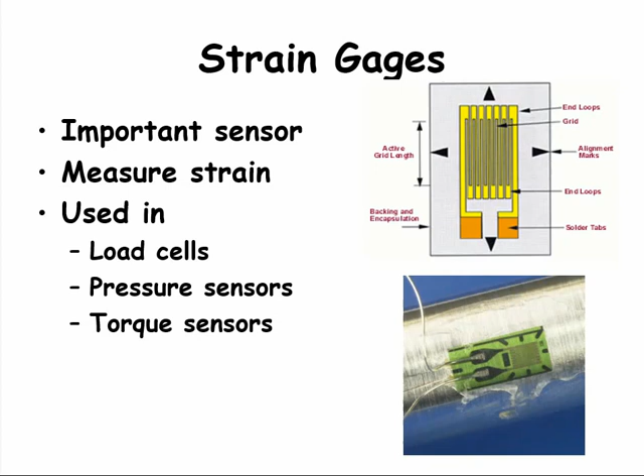Strain gauges are used to measure strain and find the stresses that materials experience using the stress-strain relations discussed in the previous video. Strain gauges are also used in other sensors including load cells, pressure sensors, and torque sensors.

Strain is defined as a change in length per unit of initial member length. Strain can be either tensile, where the member becomes longer and thinner, or it can be compressive, where the member becomes shorter and thicker. Strain can be measured using piezo-resistive materials, carbon-resistive, and bonded metallic wire.

Piezo-resistive materials came out of the semiconductor industry. They are materials in which the resistance changes when the material is subjected to either a stress or strain.

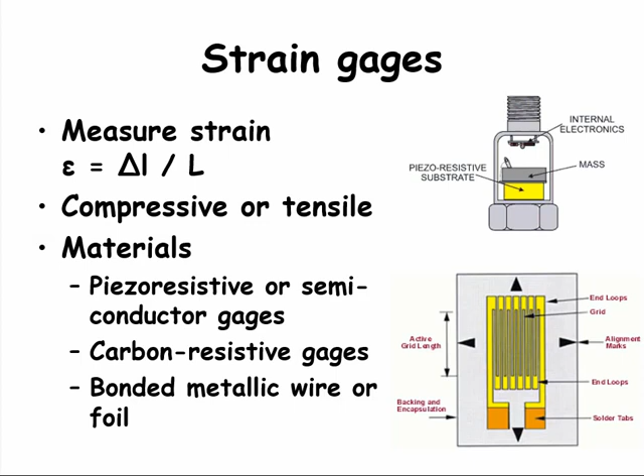The term bonded describes the fact that the gauge material used to make the active grid is mounted on a backing. Both the backing and the gauge are mounted to the surface at the point that we want to measure the strain. The alignment marks are used to place the gauge over the point where you want to measure the strain. The gauges are aligned to measure strain in the primary direction of interest. The strain reading will be an average over the entire active grid length.

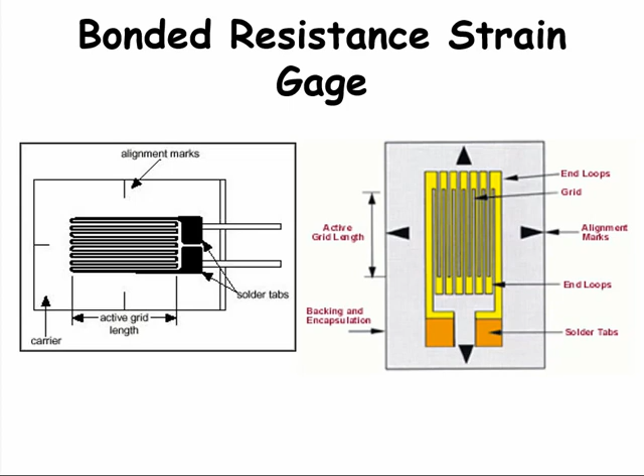Also notice the solder tabs. This is where small wires are soldered to the gauge so that the change in resistance can be measured.

The grid lines are like wires, and in some cases are actual wires. The grid lines get thinner when the active grid length is stretched due to a tensile strain. So, in tension, the resistance is the initial resistance plus a change in resistance called delta R. In compression, the grid lines get fatter or thicker when the active grid length is compressed due to compressive strain and the resistance is the initial resistance minus the change in resistance.

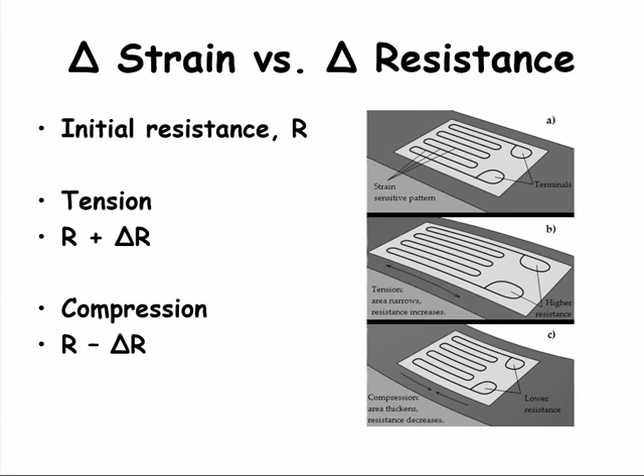Again, if the grid gets thinner due to tensile strain, the electrical resistance of the gauge increases. If the grid gets thicker due to compressive strain, the electrical resistance decreases.

The relation between change in resistance and strain is given by the gauge factor of the strain gauge. The gauge factor, capital F, equals delta R over R, over delta L over L. The denominator delta L over L is the definition of strain, so the gauge factor equals delta R over R, over the strain given by lowercase epsilon.

Strain gauge manufacturers give us the gauge factor and the initial gauge resistance. We measure the change in resistance, delta R, and can find the strain that caused the change in resistance.

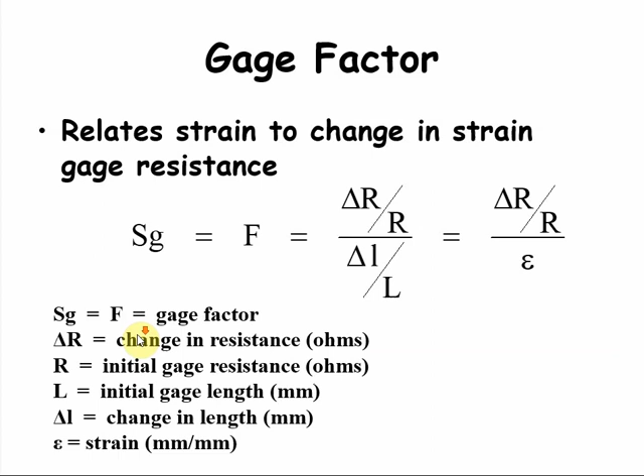Conventional foil bonded strain gauges have gauge factors from 2 to 3.2. Piezo-resistive materials have gauge factors from minus 150 to 200. The high sensitivity of piezo-resistive materials comes with a disadvantage. The materials are highly temperature sensitive.

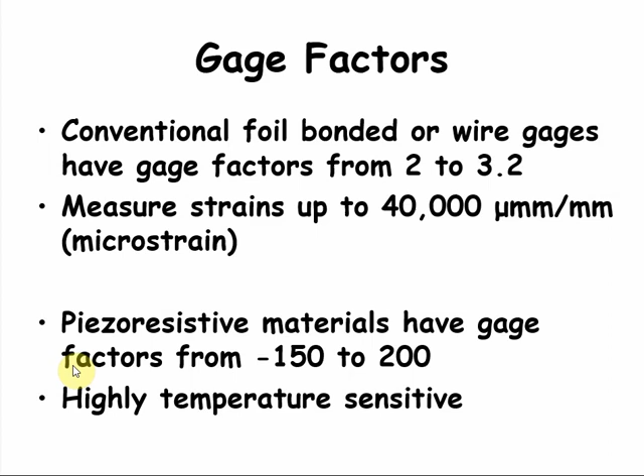If you remember, most data loggers can measure voltages, but they cannot measure resistance and changes in resistance. To convert a small change in resistance to a change in voltage that we can more easily measure, we will use a Wheatstone bridge circuit. I will talk about Wheatstone bridge circuits next time.

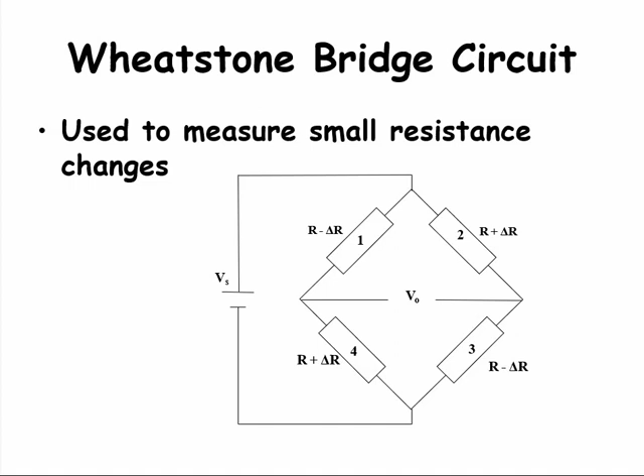Gauge length is important because strain gauges will give you the average strain over the active grid of the strain gauge. So, if you want more of an average strain, you might choose a longer strain gauge. If you want a peak strain at a point, you will want to choose a shorter strain gauge.

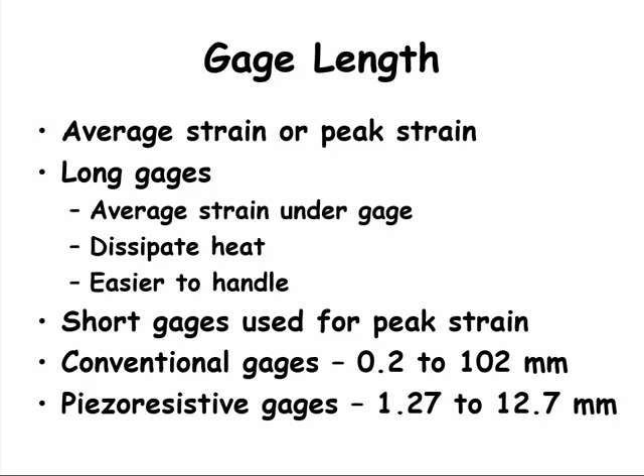Single strain gauges measure the strain along the primary axis of the strain gauge. Sometimes you want to know the strain in 2 or 3 directions. You can buy gauges that have 1, 2, or 3 gauges. Strain gauges with 2 or 3 directions are called rosettes.

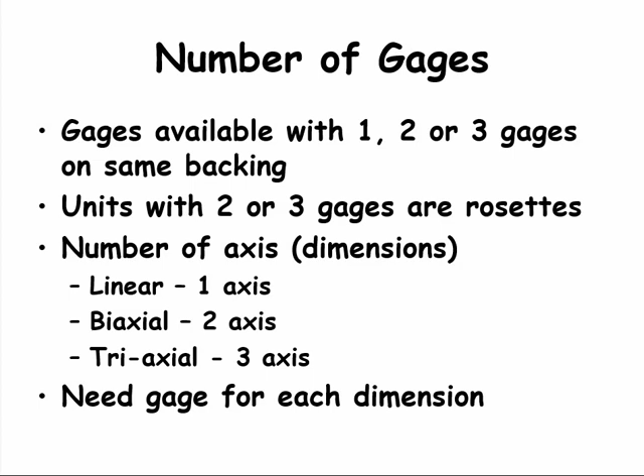When specifying strain gauges, you can specify the length, which we have talked about already, and the width. Wider gauges average the strain over the total length and width of the active grid.

In the previous slide, it was noted that a single gauge measures strain in one direction, along the primary axis of the gauge. But sometimes you want the strain in all 3 directions. To measure strain in 2 or 3 directions, you need to use rosettes.

There are 2 general types of rosettes. Stacked rosettes put 2 or 3 gauges on top of each other. Stacked rosettes can have a smaller footprint so they can find a more localized peak strain. But they tend to have heat dissipation problems. Each gauge will have small current going through it, and the current will generate heat and an apparent strain.

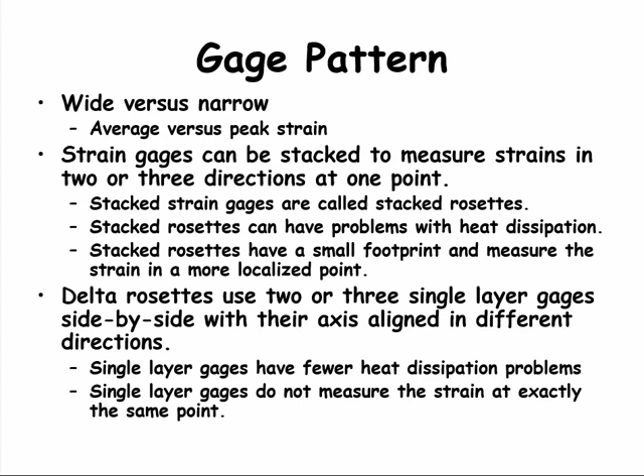The other rosette type is called a delta rosette. The gauges are side by side. They have fewer heat dissipation problems, but delta rosettes do not measure strain at exactly the same point.

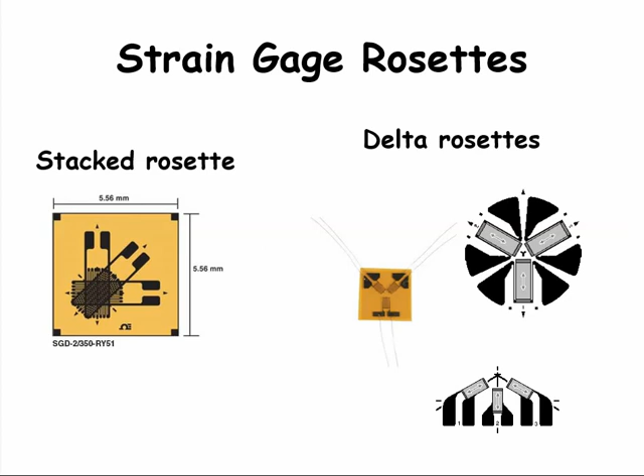Here are figures that illustrate stacked and delta rosettes. Stacked rosettes have the strain gauges stacked one on top of the other, and they measure strain in a localized point. Delta rosettes are side by side, so the strain is not exactly at the same point.

The self-heating that strain gauges have is the same self-heating issue that resistance temperature detectors have when connected to a Wheatstone bridge circuit. In the previous video, near the end, I mentioned the temperature coefficient of linear expansion. We know from the concepts associated with resistance temperature detectors that resistance depends on temperature. The heat generated by the excitation signal of the Wheatstone bridge circuit will induce an apparent strain due to thermal expansion.

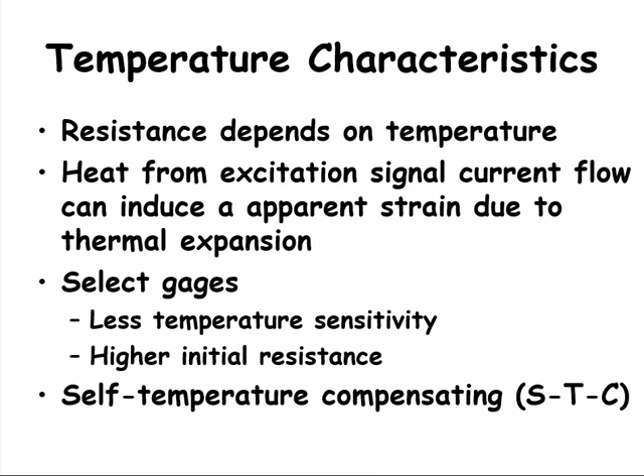Care must be taken when using strain gauges to prevent the gauge from being heated too much. Strain gauge heating can be managed by selecting gauges with less temperature sensitivity and a higher initial resistance. Many gauges now come with some self-temperature compensation. Another way to reduce apparent strain due to self-heating is to not exceed the maximum excitation voltage.

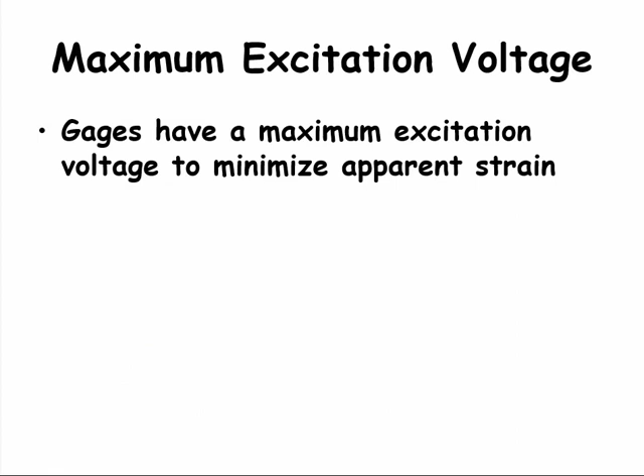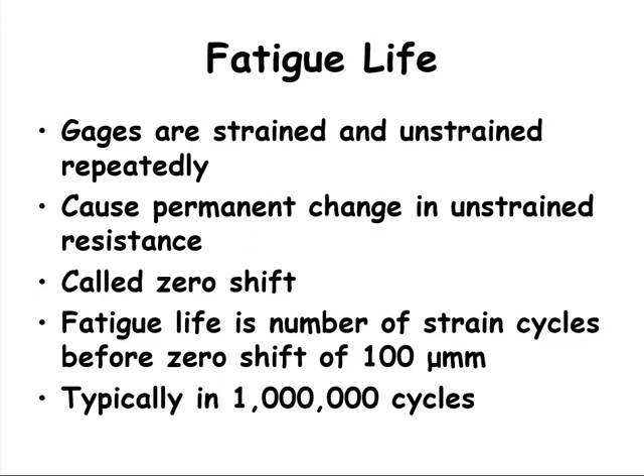Strain gauge fatigue life describes how many times a strain gauge can be strained and unstrained before the gauge has a permanent change in the unstrained resistance of 100 microstrain or more. The permanent change in the unstrained resistance is also called a zero shift, and it typically occurs around a million strained-unstrained cycles. Fatigue life is important for strain gauges used in other sensors and permanent installations.

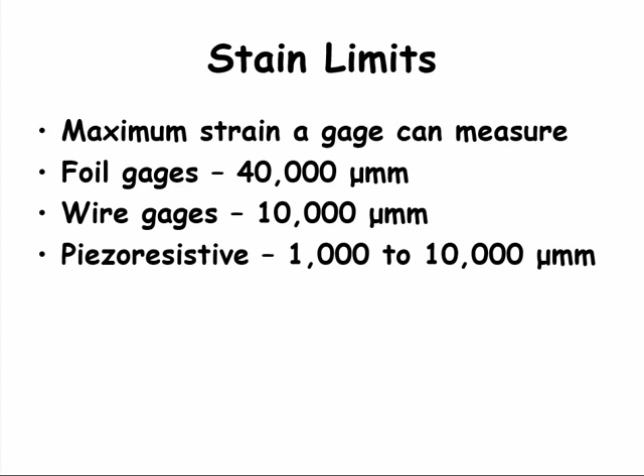The apparent strain due to gauge heating can be a problem too. Apparent strain is managed by using compensating gauges, selecting gauges with higher initial resistance, and using the minimum excitation voltage possible.

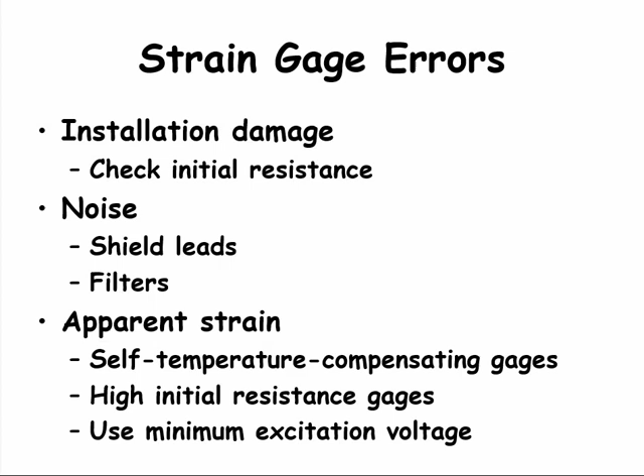Before I wrap up this presentation, I want to talk briefly about load cells. Many load cells have strain gauges inside of the load cell, and load cells are used widely to measure force, weight, and mass. Load cells come in lots of sizes and shapes and are very rugged.